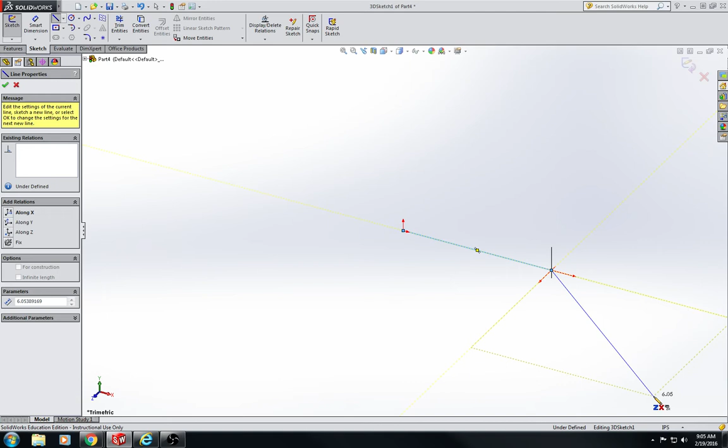When you release the mouse button, it doesn't continue the line command, so you'll click down on that endpoint you just started on, and then draw another line off at an angle, but still along the Z and X axes.

The next thing we're going to do is a center line, but it's going to be along the Z axis. When I drew that, there was a little yellow box with a Z in it, letting me know I was drawing that center line on the Z axis.

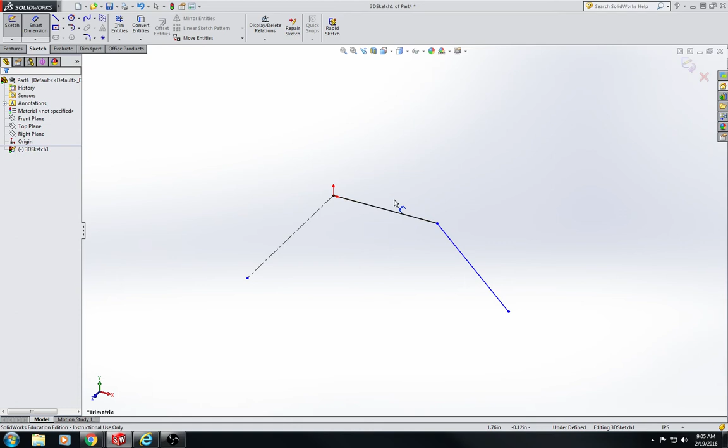I'm going to go through and smart dimension these, which can get tricky because you need to make sure you select the correct objects. The first smart dimension I'll put in is 50. Actually, I need to change this to MMGS first because this is in metric, and this is going to be 50 millimeters.

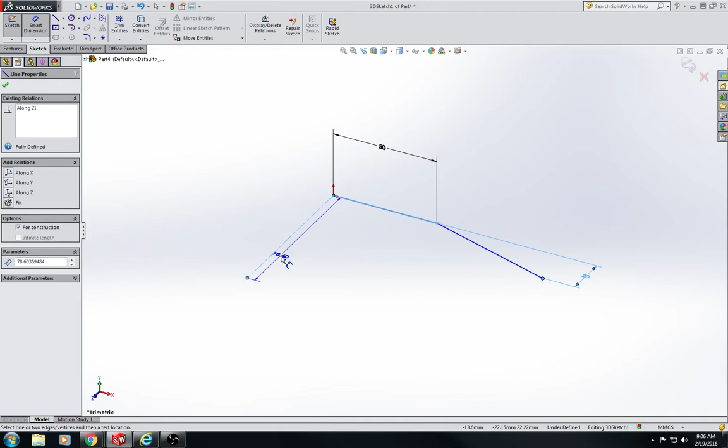The next dimension, I'm going to select the line, then select this endpoint, and that's going to be 20. Then I'm going to select the center line, not the endpoint but the center line, and then select the endpoint of this line, and set that to 210.

Okay, so that's the first part of that sketch. Now we're going to draw some more lines. This time we want to draw along the Y and the Z axes.

I'm going to click and draw a line that goes out along... what am I drawing? Oh, there we go, YZ along the Z axis.

And I'm going to draw another line that goes straight down along the Y axis, and again there's that little yellow square telling me I'm drawing along the Y axis, and then I'll draw a line back along the Z axis.

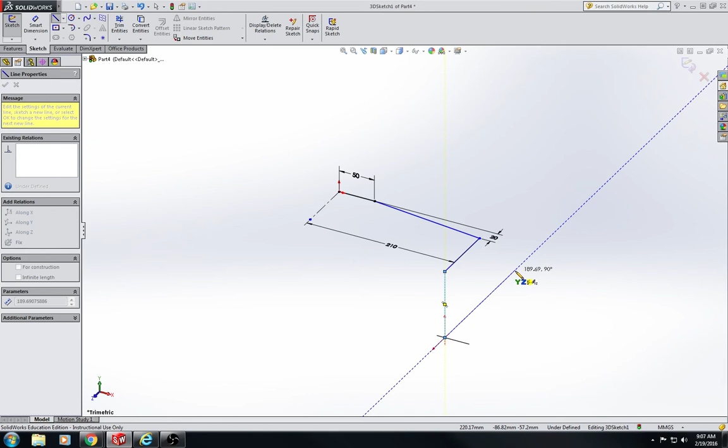I'm going to put in some more smart dimensions here. So this will be 70. This will be 140. And this will be 170. Okay, so there's my sketch.

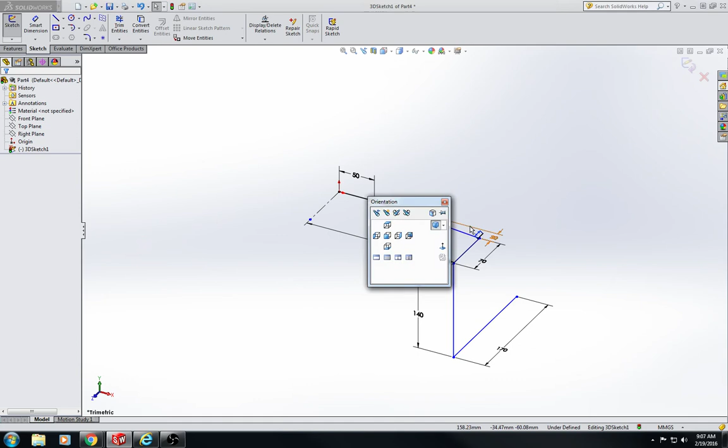It doesn't get fully defined, so it stays blue. If it's not black, that's fine.

The next thing I'm going to do is go in and put in fillets, using the fillet in the sketch tab. We usually only use the fillet feature because the sketch tab fillet is more difficult to change if you have to do that in the future, but for this, we have to use the sketch tab fillet.

We're going to select entities to fillet, and we're going to keep the corners constrained. We need to make sure that box is checked, keep corners constrained. And I'm going to set our first fillet to 100.

Then to do the next fillet, watch what happens when I click this corner. I get an error message saying the fillet cannot be added because the specified radius would eliminate one of the elements. That's saying a 100 millimeter radius here would delete this 70 millimeter line.

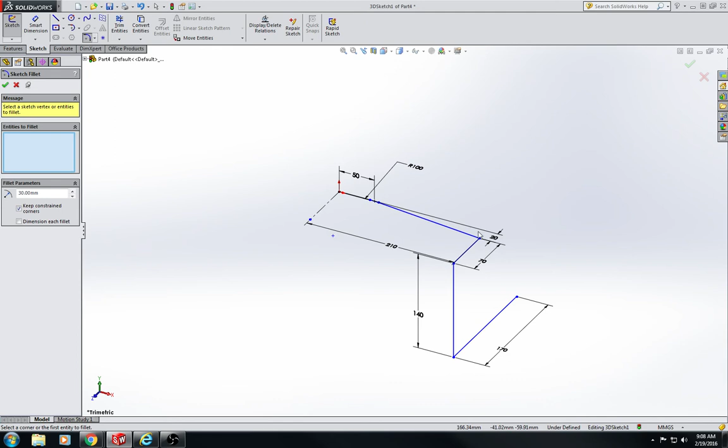So it's not a problem, I just need to put in the actual fillet size, which is 30, and then it won't be a problem. But because the last fillet I did was 100 millimeters, it automatically puts in 100 until I change it. So you put in the correct one and hit the green check mark.

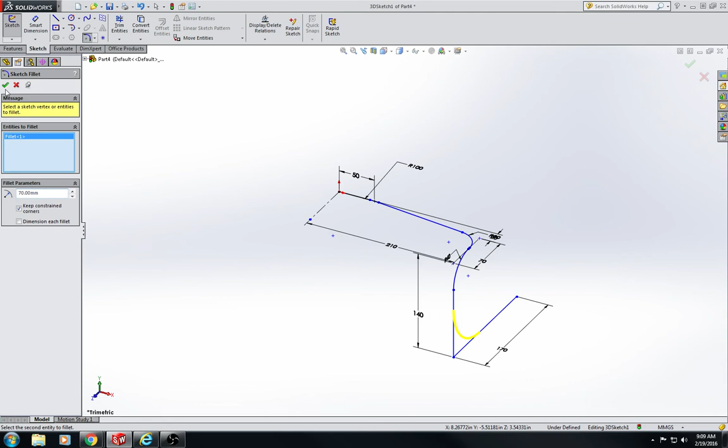Then you go to the next one. This next one's 40. Green check mark. And then the next fillet is going to be 70. Green check mark. And then I'm done.

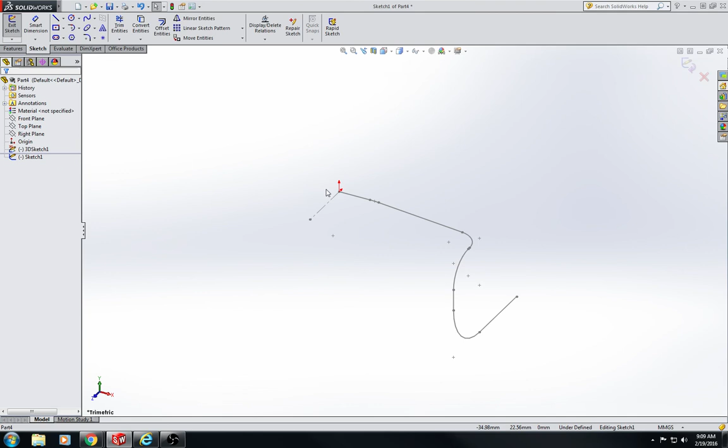Alright, so there's my sketch. After I do this, it's just a matter of doing a sweep. So I'm going to do a sketch on the right plane, just draw it on the origin because that's where we started.

This will be 25.4. Does anybody know what 25.4 equals in inches? 25.4 millimeters, what does that equal in an inch? 1 inch. 25.4 millimeters per inch. It's a good fact to know.

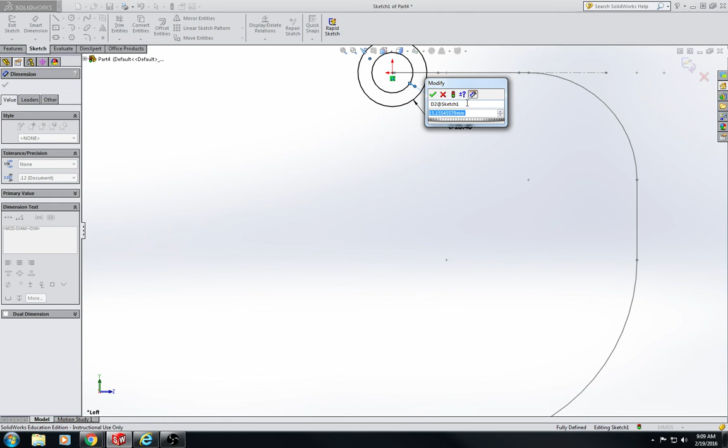Okay, after you draw those, hit the purple arrow, Features tab, Sweep Boss Base. Sketch 1 is going to be your profile, and your path is going to be the 3D sketch. So there's half the handlebars.

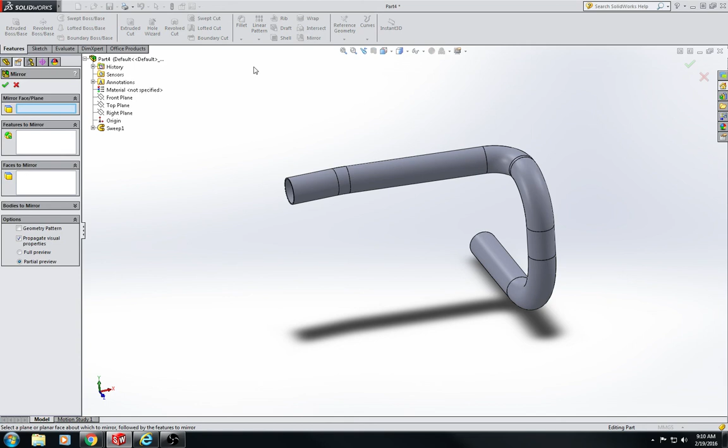Then we have to mirror them to the other side. So Features tab, Mirror. Mirror face plane is going to be the right plane, Features to mirror is Sweep 1. Boom, there's the handlebars. And then we'll change the material for the handlebars.

6061, which is an aluminum alloy. Apply, close, and there's our handlebars.

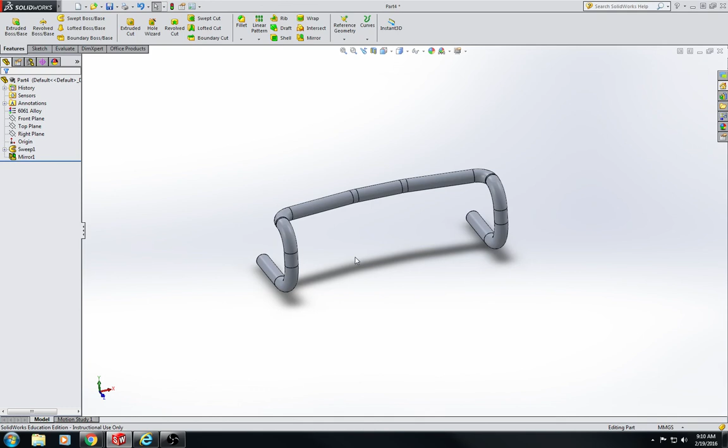Alright, somebody call up Lance Armstrong and tell him we got a new design.

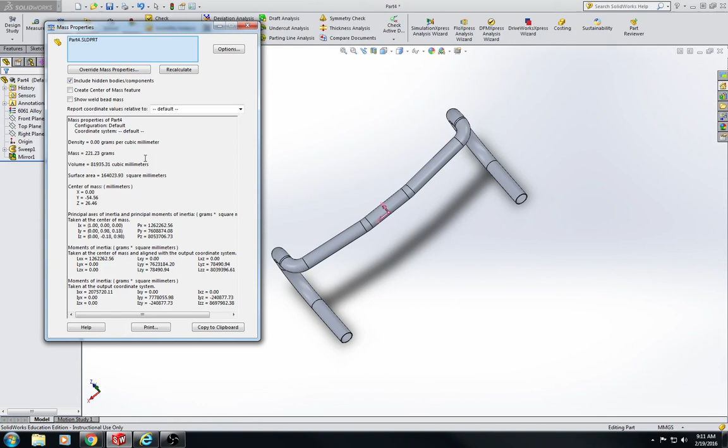And what we'll do is calculate the mass of the handlebars just to double check it. Since our sketch isn't completely fully defined, there may be some variation here. I'm getting a mass of 221.23 grams, which is exactly what the book says. But if we were to distort our blue lines, dragging them around a little bit, that mass would probably change slightly.